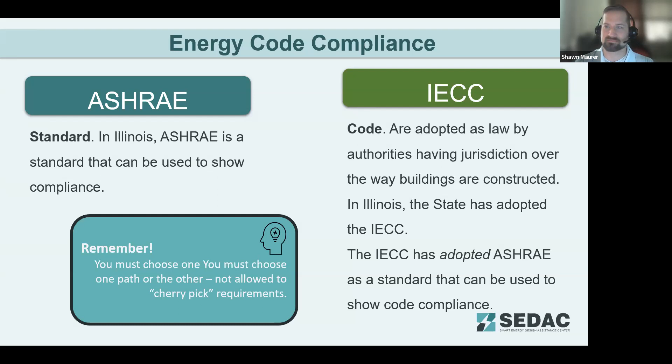This webinar or workshop is part of a series comparing the 2019 ASHRAE 90.1 to the commercial provisions of the 2018 IECC. Today we are covering lighting and electrical. Later in May, we'll be covering performance-based compliance again, and we have previous recordings for mechanical and envelope systems on our webpage.

We'll also be covering later this month building energy education for architects. We'll be looking at renewables and the zero code, getting buildings to net zero through code applications. We'll also be touching on passive house later in May as part of that education series. And then at the end of May, we'll be touching on the 2021 IECC updates, as we want to be as current as possible with updates and amendments that are working through CDB.

So we're going to do that as close as possible to the application deadline for those 2021 IECC updates. And then we'll also be doing a presentation on testing and verification, how to ensure your buildings are complying with the energy codes, in June.

As noted before, there are two compliance paths for compliance with the Illinois Energy Conservation Code: one being direct application of the compliance paths of the 2018 IECC, the other being the compliance options in the ASHRAE 90.1 standard. Some clients have elected to use a newer version of the ASHRAE standard to increase their energy savings, as it has some improvements. But for specific compliance with the 2018 IECC, the reference standard is ASHRAE 2016. 2019 will be the reference standard for the 2021 IECC when looking at ASHRAE compliance pathways.

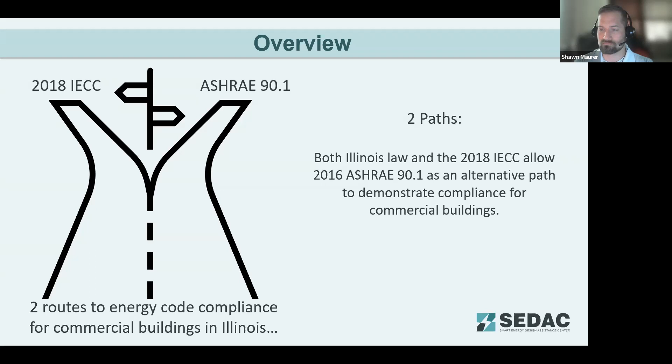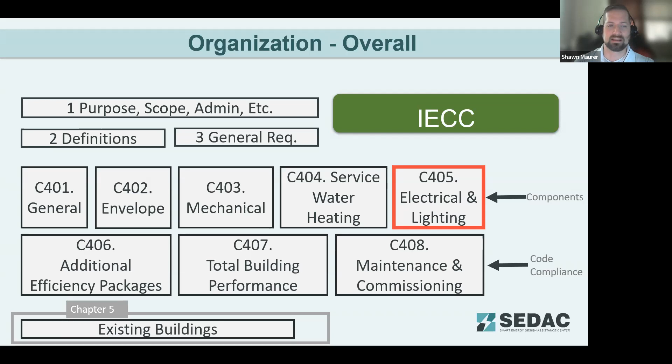Just an overview of the overall organization between the IECC and ASHRAE. We're going to be looking at Chapter 4, Section C405 of the IECC. That's the lighting and electrical compliance, and touching a bit on existing buildings in Chapter 5. The key thing here to note is that IECC does break out existing building requirements in a separate section, and lighting and electrical is grouped in with the main prescriptive requirements in Chapter 4.

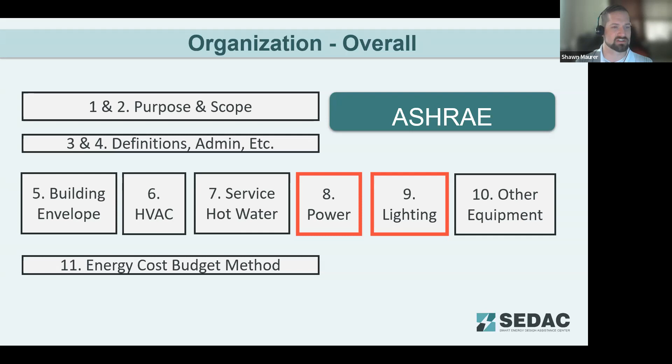As we look at the ASHRAE organization, it has an additional section on power requirements - a lot of these are going to be added in the 2021 IECC - and a section for lighting. Within those sections, they have the mandatory requirements grouped first, then the prescriptive requirements, and the existing buildings requirements are all built into those sections, so they're not in a separate chapter like in the IECC. In some cases, this can make referring to the requirements for existing buildings a little bit easier in ASHRAE, and also can make referring to mandatory requirements a little bit easier, as they have a dedicated section with each component of the building.

But today we are focusing on lighting and power requirements. The layout within these sections is very similar for the IECC and ASHRAE as far as the compliance pathways. Looking at the ASHRAE organization overall, power and lighting both have the same general organizational layout, with general requirements listed first, definitions of the compliance pathways in the next section, the mandatory provisions, and then moving into the prescriptive pathways and alternate compliance pathways, and then the performance pathways such as the energy cost budget and Appendix G.

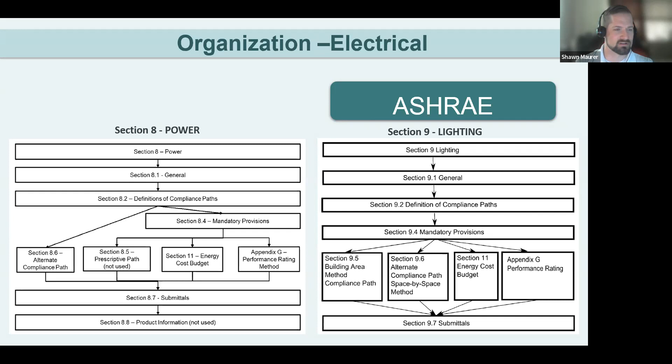Those are all followed up by required submittals and documentation. Similarly to ASHRAE, IECC's organization has the mandatory requirements interspersed throughout the section, although for the lighting section, most of those are mandatory provisions.

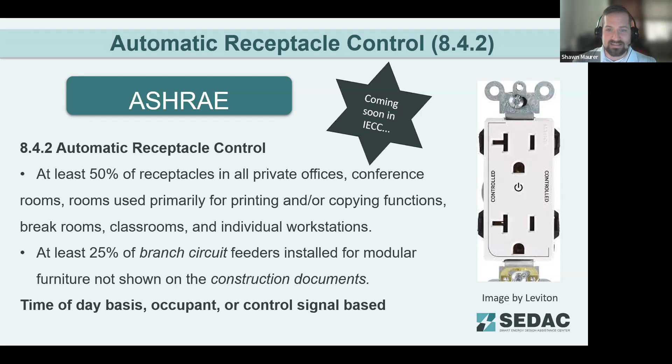And so, as noted, this is coming in the 2021 IECC. Something else that ASHRAE contains that is coming in the 2021 IECC is sub-metering or monitoring of electrical systems and HVAC systems. So these measurement devices are going to be installed in new buildings. They'll have to monitor total electric energy, HVAC systems, interior lighting, exterior lighting, and then receptacle circuits.

It can be very useful for troubleshooting and identifying issues in a building, as if you have sub-metering of individual systems and an individual system has an issue, you can see that in a blip in its energy performance trends. So the intent of these kinds of monitoring controls is to assist in long-term commissioning of the building and maintaining its performance over time.

Data for these monitoring systems needs to be held for at least 36 months. So again, you can do that kind of comparative analysis and have the ability to do some in-house commissioning of systems.

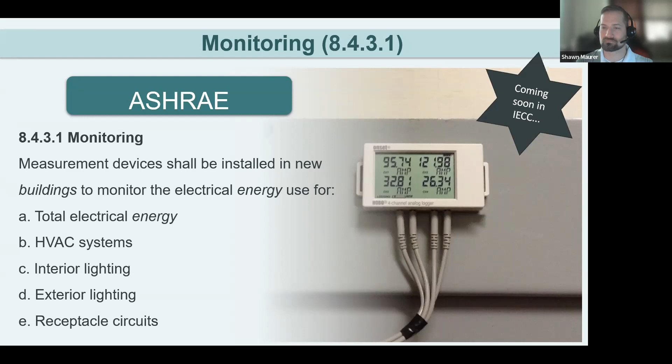Recording and reporting data for tenant spaces is where this is particularly being applied. Electrical energy for all loads specified in section 8.4.3.1 shall be recorded a minimum of every 15 minutes and reported at least hourly, daily, monthly, and annually. Data for each tenant space shall be made available to that tenant. Particularly important for like strip malls and places like that, large office buildings with multiple tenants in it, so that individual tenants can know how they're performing in their facility.

Buildings with a digital control system installed to comply with the BAS requirements of the HVAC section of the standard, that energy use required in this section shall be transmitted to that control system, so you have a central repository for data monitoring and tracking.

There are some exceptions to this requirement, generally smaller buildings, so looking at buildings less than 25,000 square feet, individual tenant spaces that are less than 10,000 square feet, dwelling units with residential buildings less than 10,000 square feet of common area associated in them, and critical equipment and branches of the NEC Article 517 are exempted from these requirements for data monitoring and reporting.

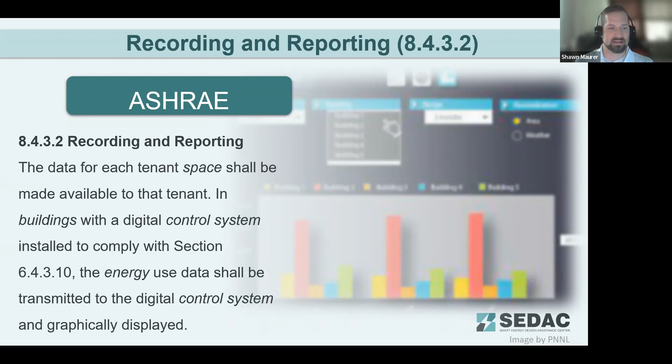Again, the main thing here is it's looking at long-term tracking of building performance and maintaining that performance over time, helping building operators and engineers figure out, is there an issue, quickly diagnosing where that issue might be through these trending requirements.

Something else in ASHRAE that is not in the IECC is a service water pressure booster system requirements.

One or more pressure sensors shall be used to vary pump speed and/or start-stop those pumps. The sensors shall be located either near critical fixtures to determine the pressure required, or some logic shall be applied that adjusts the set point to simulate operation of remote sensors. No devices shall be installed for the purpose of reducing the pressure of all water supplied by a booster system pump or booster system, except for safety devices.

So if you're boosting the pressure up, you don't want to be boosting it up really high and then throttling it down somewhere else with a pressure reducing valve. This is working towards properly sizing these pressure boosting systems and not oversizing them. And then no pressure booster system pump shall operate when there's no service water flow - you don't want to burn the pump up. So kind of a best practice, common sense requirement there.

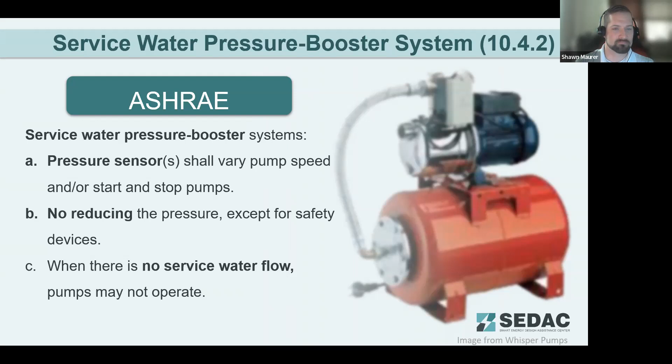And then lastly, looking at clean water pumps and those control systems, there are some requirements in ASHRAE. I won't go through all of these in detail, but for pumps meeting these certain requirements, they have to meet the requirements shown in a table in ASHRAE for motor efficiency. The standards of that section do not apply to fire pumps, self-priming pumps, prime assist pumps, magnet-driven pumps, pumps designated for use in nuclear facilities, and pumps meeting specific U.S. military specification requirements that are already anticipated to have higher efficiency associated with them. But again, this is just looking at pumps that typically have higher operating hours and conditions, that they meet specific efficiency requirements.

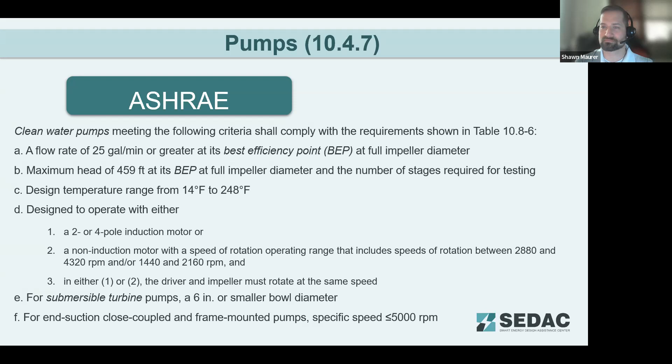Then lastly, an interesting addition in the IECC that's not in ASHRAE, kind of a rare situation here. Usually ASHRAE has requirements not in the IECC, but in this case it's the other way around. The IECC does have requirements for escalators to have regenerative drives. So escalators that are bringing people down in a facility, once they hit this weight capacity requirement, they're anticipated to have enough energy in that gravitational potential of the riding occupants that a regenerative drive will supply some energy back to the building at a cost-effective means. So just an interesting addition in the IECC - not sure if this will be coming to ASHRAE in the future or not yet, but it is important to be aware that this exception is in the IECC and not in ASHRAE.

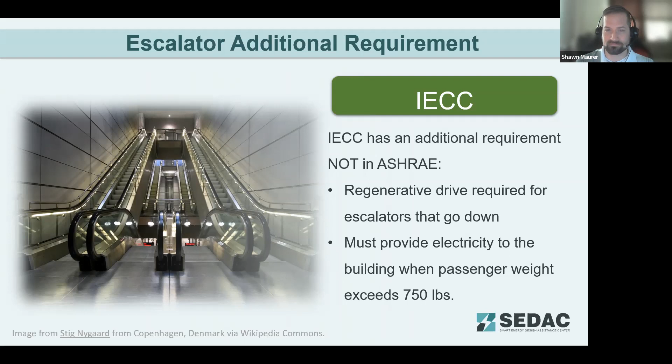So before we move on to the lighting requirements, we have another poll here. So what categories need to be monitored under the 2019 ASHRAE 90.1? Thinking back to the monitoring and reporting of electrical systems: total electric energy, HVAC systems, interior lighting, exterior lighting, receptacle circuits, or all of the above. And then, where is automatic receptacle control required in 90.1? Anywhere occupant sensing controls are required - offices, conference rooms, classrooms, etc., outdoors, habitable rooms and corridors, or everywhere.

I don't see any new questions have come in yet. Give it another second or two. Got a couple of responses coming in still. Okay.

So the first question, what categories need to be monitored? It is all of the above - so all of those do need to be monitored and tracked, again looking for tracking of building efficiency and performance over time. And then for our second question, where is automatic receptacle control required? It is offices, conference rooms, classrooms, etc. Looks like most people got that one correct.

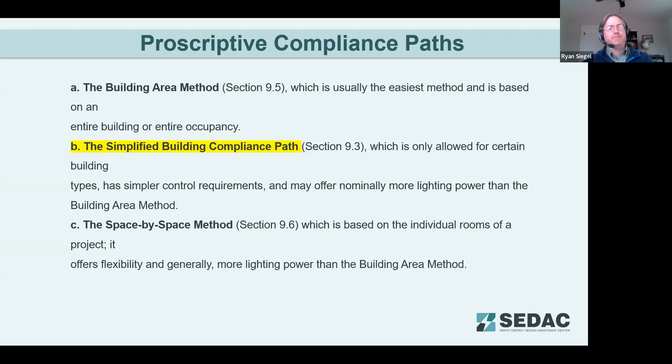So if you are using the building area method or the space by space method, there is a table that specifies the on and off controls that are required for this.

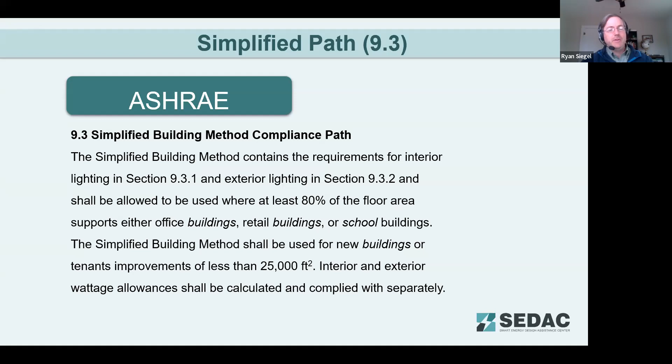Noting one of the thresholds is at least 80% of the floor area needs to be the primary building type of office buildings, retail, or schools to be eligible for this simplified building method. It can also be used for tenant improvements where you have a smaller tenant going through an upgrade, so tenants of under 25,000 square feet can be handled on their own through this.

Here's a little bit of a look at this using the office building type. We have a lighting power allowance of 0.7 watts per square foot throughout the area, and then the controls specify here's what controls you're needing for the space type.

Specifying for spaces in the office buildings other than parking garages, stairwells, and corridors, you're going to have automatic off controls. Throughout this, the lighting load, there is an allowance to leave some lighting on. This provides for egress and other needs you may have in a building to make sure that people can leave safely, even if the lighting controls have turned off.

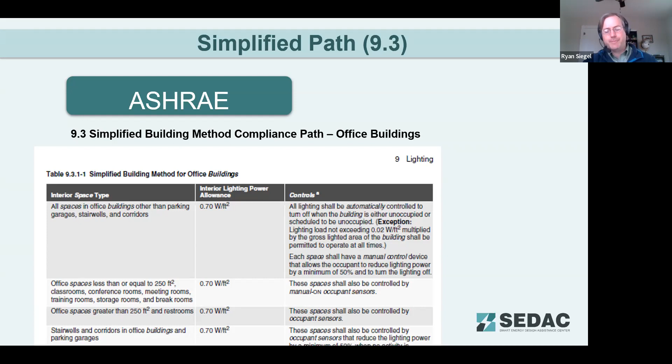So the simplified path also has its own table for exterior lighting power allowances. What we like to make sure people are aware of is, for most people and most projects, these are going to be in zones 2 and 3.

Zones 0 and 1 are for rural and uninhabited locations - think national parks and other natural areas. That's your zone 0 and 1. Zone 4 is for heavy commercial in major metropolitan areas, so zone 4 will only be found in certain locations within the city of Chicago here in the state of Illinois. Everywhere else in the state of Illinois is going to be in zones 2 and 3.

How you're differentiating between zone 2 and 3: zone 2 is more residential, zone 3 is commercial. So if you're not totally sure whether you're dealing with a zone 2 or zone 3 project, feel free to reach out to your building official and they can help provide you guidance. If you think you might be right on the border, they can help make that determination with you.

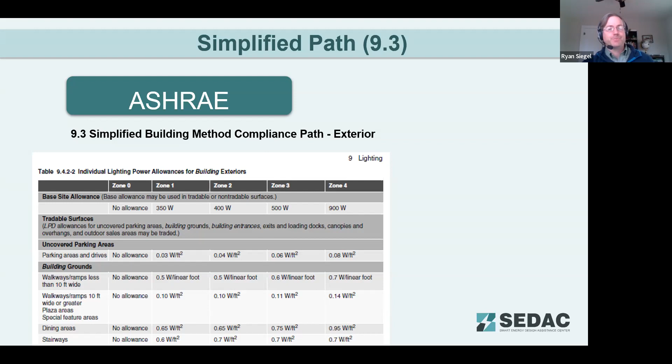For those not using the simplified method, here's where you get into the space by space method for what the controls have to be. In ASHRAE, they have several that are required, and then you'll see add ones and add twos. This doesn't mean you have to add one of B or C and then add two of H or I - what this means is add one of each of these two categories.

So I need to add either category B or C, and I need to add one of category H or I - add one of category 1 and add one of category 2. It can be a little confusing as we're going through here, but with add 1, understanding that add 1 is based on how this is controlled for turning on: either this is going to be manual on, or if it's automatic on, it's only partial.

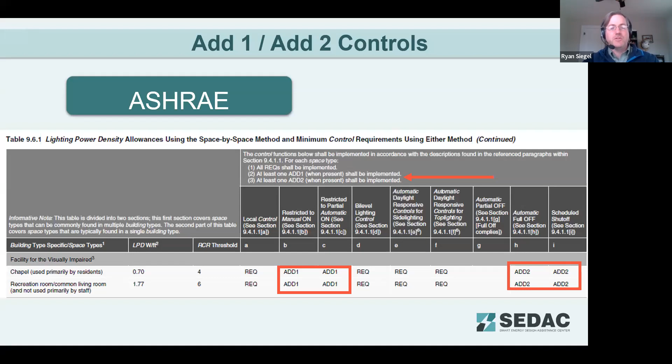So it's going to be a 50. You cannot automatically bring it on to more than 50% for specific spaces.

Something ASHRAE does a little bit differently is if you add some additional controls, you can get some additional lighting power allowances. For those more familiar with IECC, they may typically have a little bit higher lighting power allowances, but allow you to trade a reduced lighting power allowance for less control. These operate in similar fashion practically speaking, but they're worded differently from each other. So again, for ASHRAE, if you add more controls, then you can get a little bit more power budget.

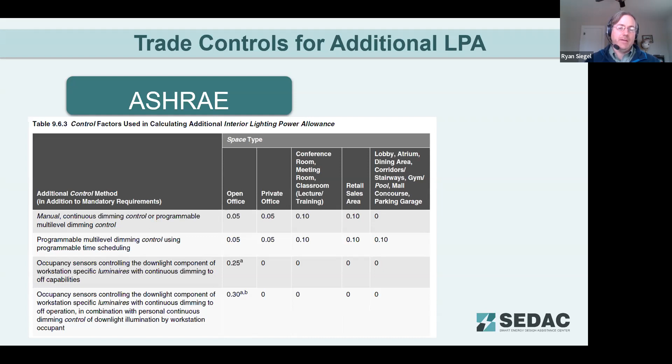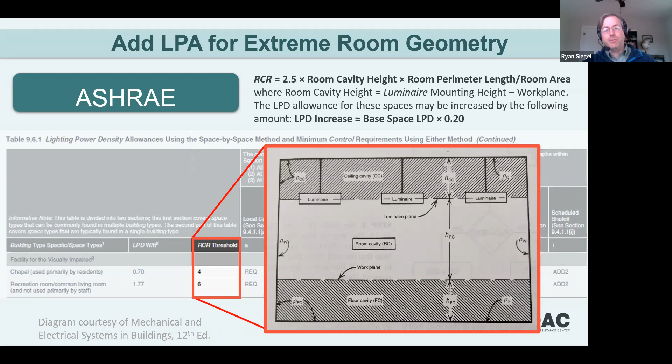ASHRAE also has some provisions for unusual room geometries, a room cavity ratio. So if you have unusually long rooms or unusually tall rooms, through this RCR calculation, you can increase your lighting power density if you have one of these more extreme room geometries. Part of this is accounting for light bouncing off of walls - if you have unusually tall spaces, you're not able to bounce that light off the walls. Similarly, if you have unusually long rooms, the walls will end up absorbing a lot of that light that would otherwise reach the floor. That's part of the reason why they've added these in.

And you may have seen there, it gives you about an extra 20% if you do need that.

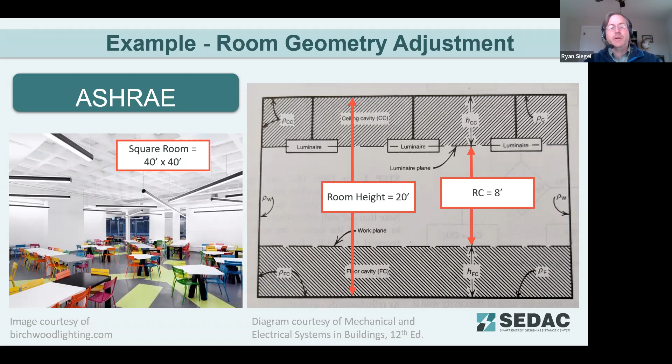So here, what we're looking at is we've got a 40 foot by 40 foot room, total room height of 20, and the cavity between the luminaire and my work plane here is specified as only 8 feet. Because I have a very tall room relative to my fixtures - or because my fixtures are not using up that large room height - I end up not gaining or not needing that extra bonus budget. If I did move the fixtures much more towards the ceiling, then I might cross that threshold.

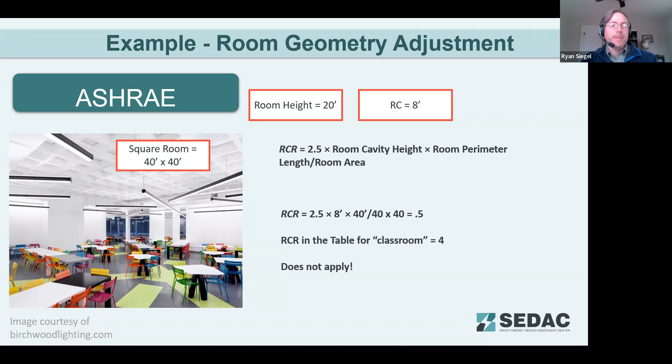Here the room cavity ratio calculation shows a result of 0.5. In order to cross that threshold for a classroom space, I need to be above 4. So as you can see, these are rather extreme cases.

Here is a similar, different type of classroom setting, but here we've got a very tall room at 35, and the fixtures are all towards the ceiling. So my room cavity at 32 feet, going through the calculation, gives me a room cavity ratio of just under 13. So here we do get above that 4 threshold, so I do have that extra budget in there.

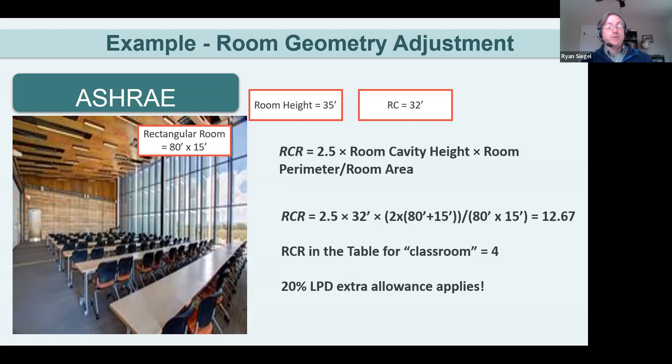Manual controls - ASHRAE does have manual control requirements, which, as we think through this, having manual controls even if I do have automatic controls is good practice, from the standpoint of wanting occupants to have the capability to turn the lights off when they're not needed. You may have occupants in the room who don't need the lights, either because of windows or because of the type of work they're doing. If they're doing a presentation and trying to read a screen on the wall, having the ability to turn those lights off and have that manual control is very beneficial for them.

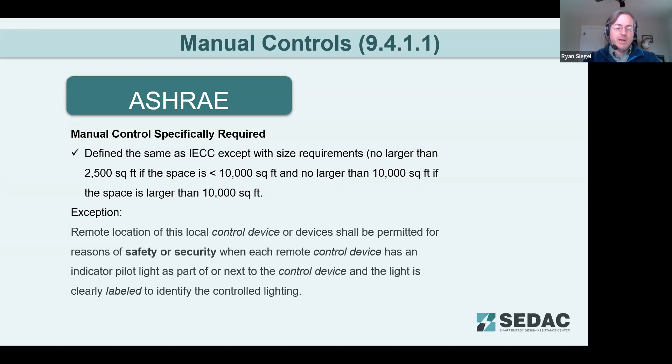So with that, let's do a little bit of examples as far as some of our controls. Here looking at a meeting space, 20 foot by 40 foot, so we've got 800 square feet of room space.

Total lighting load in this space is 200 watts, or 1/4 watt per square foot. Ceiling is 7.5 feet tall, and I've got windows that are 7 feet off the floor, with 7.5 square feet of window or fenestration per window, and we have 4 windows in this space. So this is the sample room that we're going to look at for reviewing these controls.

First, is continuous operation necessary for safety or egress? Being that this is a meeting space, we don't have to have 24/7 lighting for safety and or egress. If we did, then controls would not be required. Typically for continuous operation and for safety, this would be hospitals, laboratories, or other areas where if the lights were to go off, that would really cause a safety hazard. Since we are not required for continuous operation, we'll go on to question number 2.

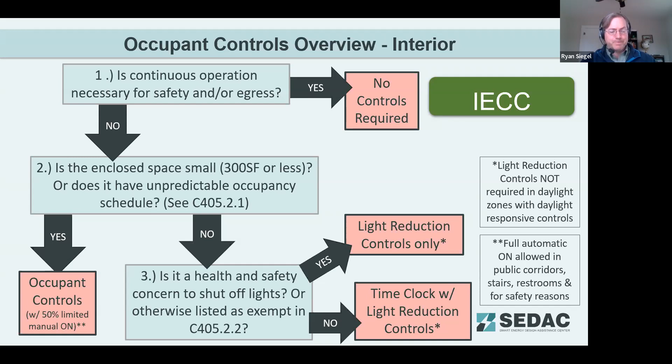Now looking at daylight controls, continuing in the IECC. First question: is the space adjacent to fenestration of at least 24 square feet, or a skylight? We mentioned earlier those windows were only 7.5 square feet per window, so I don't meet that 24 square foot threshold. Because I don't, daylight controls would not be required for that space.

If we assume for a second that it was, then the next question is, does it receive sufficient light? That's dealing with whether I have blocked sunlight through adjacent buildings and other things, or is there more than 150 watts of electric light in that zone? If we do get sufficient light and there's more than 150 watts, then we get into a question of, did I use reduced lighting power density? If I did, then I can avoid the use of daylight controls. Otherwise, if I used more of my power budget, then I would have to add daylight harvesting controls.

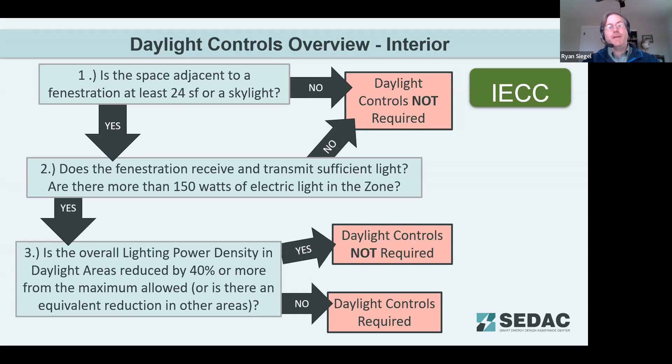As we move to the outside of a building, there's a few questions to check as far as exterior lighting controls. First, is the lighting controlled from a dwelling unit? This is a commercial building, but you may have residential dwellings in a commercial building. Or is it a vehicle entrance for a parking garage? If it is, then you don't have to do any automatic setback.

Presumably for the dwelling units, that's going to have your manual controls inside—typically for a balcony, someone's going to turn a light on when they go out and turn it back off when they come back in. If not, then we need to look at sensors. First, we do have to have a daylight sensor for exterior lighting controls.

Then the second question is, is this lighting decorative? That could be landscape lighting, facade lighting—those are probably the two most common out there. If it is decorative lighting, then we need to have a timer to turn them off during non-business hours. It does allow for an additional hour beyond your actual non-business hours, so if your store closes at 5 p.m., the decorative lighting needs to be turned off by 6 o'clock.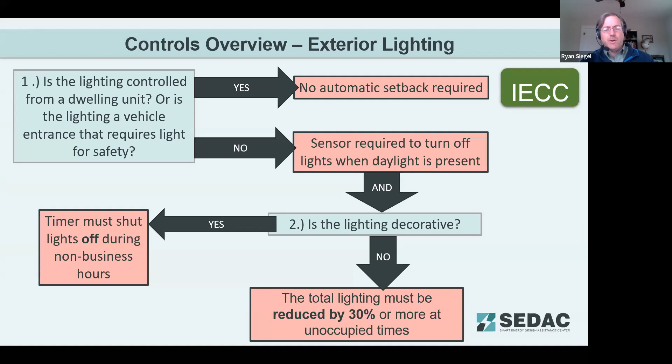So with that, let's take a look at some comparisons. We've got a poll question.

So looking at our lighting controls here. First question: in the IECC compliance example for the meeting room we talked about, that 800 square foot meeting room, which lighting controls were required? Occupant sensing controls, light reduction controls, manual controls, daylight harvesting controls, or time switch controls? And then our second question: which of these locations does not require occupant sensing controls? Classroom, laboratories, offices, spaces 300 square feet or less, or restrooms?

Give it another second or two for people to answer. Okay, go ahead and share those.

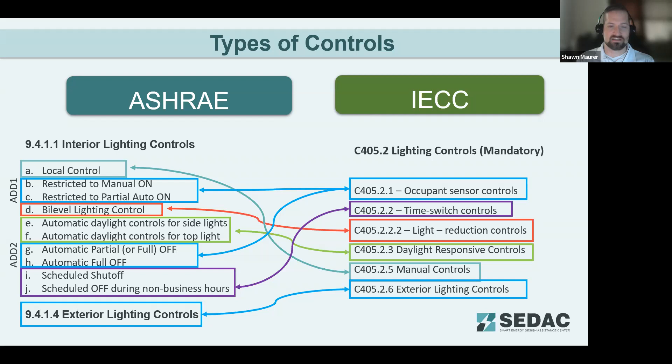Manual controls tie into the local control of ASHRAE. The requirements are very similar there. As Ryan touched on earlier, there's a slight difference in the square footage application between those, where ASHRAE's got a couple of steps that IECC does not. And then lastly, exterior lighting controls—these are very similar between the two. So just looking at them in detail.

Controls fall into three main categories in the IECC. You've got local control, which is pretty much required in every space. Then occupancy and vacancy based control with automatic off or timer controls. And then light level controls through daylight sensors and light reduction control requirements.

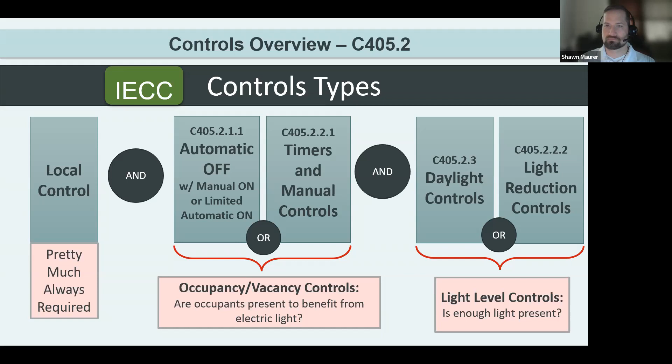Looking at ASHRAE, again, very similar breakout. Local control is pretty much always required in spaces so that occupants have that manual control capability. Then you've got the occupancy and vacancy-based control components, and lastly, your light level controls and daylight harvesting requirements.

Daylight and dimming, similar to the IECC, work together because photo control should reduce electric lighting power in response to available daylight using continuous dimming down to 20% or less, and then off. There does need to be a full off option. But in the case of ASHRAE, daylighting controls must coordinate with bi-level lighting controls. This is another additional step in ASHRAE that's not tied in IECC.

If you've got the dimmer or other bi-level control that's requiring lighting to be at a reduced lighting level, your daylight can't then adjust the lighting above that required level, and vice versa. If your daylight sensor is dimming the lighting, your bi-level controls can't then turn on lighting beyond that required lighting level that the daylight sensor is asking for. So there's a little bit of control complexity introduced here trying to maintain that lighting efficiency, but it does add a little bit of complexity in your control requirements.

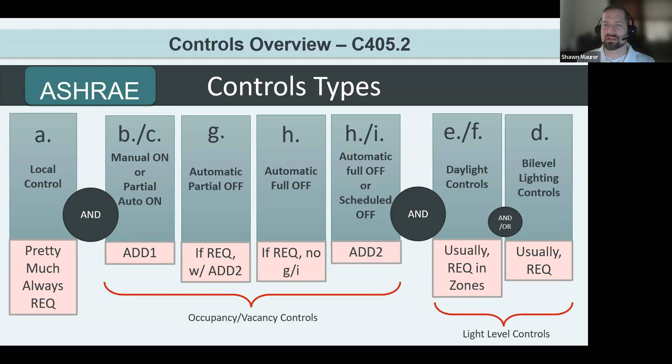So again, thinking back to our IECC example for the meeting room, we're going to look at it here on the ASHRAE side. For conference or meeting space, the space is going to have automatic partial off control per the table shown here. And then daylight responsive control must continue to control the lights, but it must stop adjusting lighting power above that automatic partial off set point. So this is kind of that interaction we were talking about.

The IECC states that bi-level control needs to decrease lighting to at least 50%. So off is at least 50%—that's a valid state. Again, ASHRAE requires at least that one intermediate step between 70 and 30%, or continuous dimming capability.

Coming up new in the 2021 IECC, compliant light reduction options are going to be a little bit clearer and more in line with the LED era. So lighting power densities are going to get a little bit lower. Control options are going to get changed a little bit to account for the efficiency of LEDs. These options are going to include continuous dimming of all luminaries from full down to that 20% lighting power and then full off, and switching of all luminaries to that 30 to 70% of full power. So it'll be more in line in the 2021 IECC with these ASHRAE requirements.

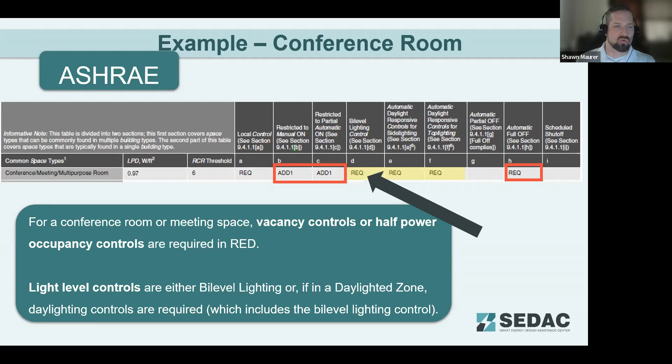What we're calling out here again is that for a conference or meeting room, that bi-level lighting control requirement is required for that space.

So looking at our example conference room, going through the IECC process flow here again. IECC is going to require occupancy sensors for a conference or meeting room—it's on that list of required spaces. And then since that space is larger than 300 square feet, but it does have that unpredictable occupancy, as Ryan mentioned, it's going to require occupant controls with that 50% limited automatic on requirement.

The big difference between ASHRAE and IECC here for this particular space is that in the IECC, there's not a requirement for that lighting level control if automatic on is used. So where ASHRAE requires that mid-level step between full on and full off, IECC can allow full off control there.

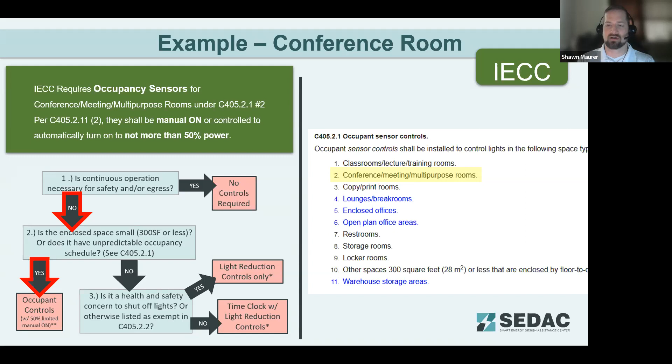Here, looking at the daylighting control requirements for the IECC, again, as Ryan covered, in the IECC, the daylighting controls is looking at the individual area of fenestration in that space. So as long as an individual window isn't greater than 24 square feet or under a skylight, then daylight controls were not required for that conference space.

In ASHRAE, however, it looks at the total fenestration area serving that space, not the individual window units. So in the ASHRAE example, it would actually require daylighting controls in that space, just based on the fenestration area. But then looking at the controlled lighting within the control areas, because it's less than 150 watts of lighting in each daylit area of those windows, it would be less than 50 watts most likely. You probably only have one fixture served by the daylight area of each of those small windows. Then daylight controls would not be required. So it's the same net result in the end, but a slightly different pathway to get there.

And again, we like to note that the IECC does have an additional exception that's not in ASHRAE: if you can reduce your lighting power density by at least that 40%, then you're not required to have the daylighting controls. So again, accounting for as we get more efficient with LED lighting, there's diminishing returns on having additional controls of more efficient lighting. You can save that capital cost for the building by going above and beyond on reducing the installed lighting power, to then avoid having to put in additional controls.

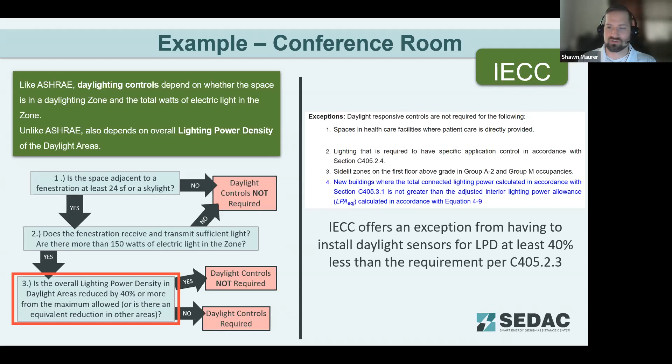Again here, touching on that bi-level lighting control for lamps with daylight control. Since occupant sensors are required in this space, it does have that step-off requirement for light reduction controls. In the IECC, that step can be at least 50% or full off, because that falls in the at least 50% requirement. For ASHRAE, you have to have that intermediate step between 70 and 30%, or continuous dimming for those light reduction controls.

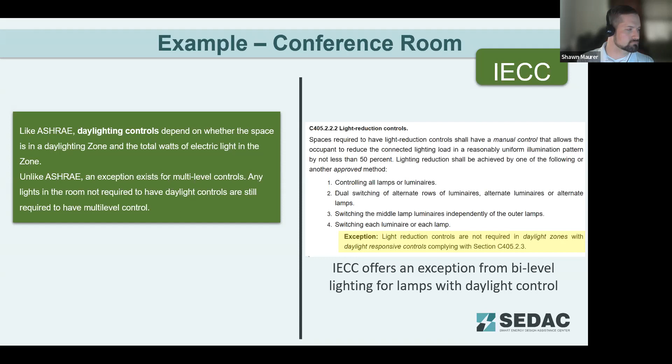Looking at occupancy sensing requirements, this is the list of spaces in the IECC where occupant sensing devices are required. For most buildings, this is going to be almost every space in the building. New to the 2021 IECC, corridors are going to be specifically listed as one of the applications requiring occupant sensors,

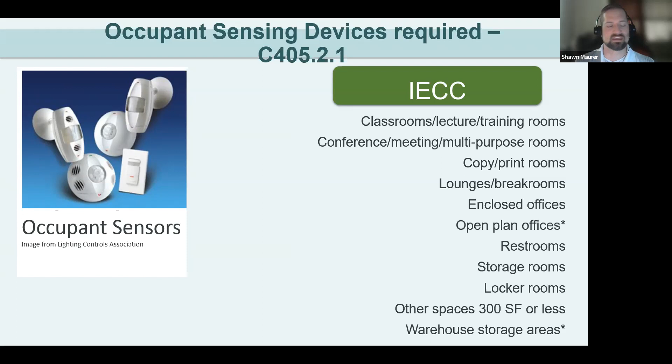and they'll have their own section with specific requirements for lighting level controls tied to those occupancy sensor requirements. Unless the corridor is lighted with a bare amount of illumination required for safety, that bare minimum safe passage lighting requirement, then lighting power must be uniformly reduced by not less than 50% within 20 minutes of that hallway being unoccupied. We do see this applied in some buildings already, but this is now making it a prescriptive requirement.

Something that's slightly different in ASHRAE than IECC when looking at daylight zone definitions: ASHRAE has incorporated a definition for multi-story spaces on what areas are going to qualify as daylit areas. On the top floor, underneath a skylight assembly in that atrium space, it's going to be the normal definition. But as you go down through the atrium, as floors block off that light level down to the subsequent spaces, you narrow down that daylit area that falls into the requirements for daylighting controls. This adds a little bit more clarity on how to apply daylighting controls to a multi-level, multi-story space that's not currently in the IECC.

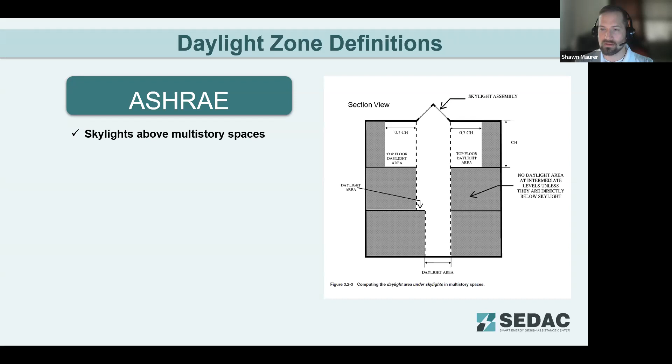Some slight differences in daylight zone definitions. Here, ASHRAE accounts for projection factor for side lighting calculations that the IECC does not account for. IECC has a specific area that counts as side lit area based on the height of the window from the floor to the top of the fenestration assembly laid down into the floor plan. That gives you your daylit area out from the wall, and then 2 feet on either side of the window. For ASHRAE, it's slightly different, and they do have this projection factor adjustment incorporated in there.

ASHRAE also has a secondary side lit space defined as well. When looking at the primary side lit area, that's the area laid down just as in the IECC definition - you take the window height to the top of the window above the finished floor, lay that down onto the floor plan, that's your primary side lit area. The secondary area is just taking that area and duplicating it again more towards the core of the building - essentially double the window height into the space.

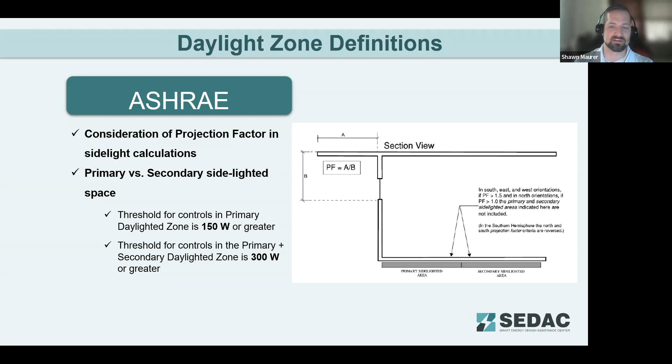So we saw this chart with the simplified building method again. Now we're just bringing it up again to go over the building area and space by space methods. Generally, these requirements are the same as the IECC as far as the spaces included. The building area method spaces are the same, and the space by space method spaces are the same, because they come from the same general resource.

Interior lighting power density requirements for the building area method generally give you a lower lighting power allowance. The space by space method generally gives you a little bit more lighting power allowance, and with the ability to trade off between spaces, you get a little more flexibility in your lighting layouts with space by space than you do with the building area method.

When looking at the lighting power density allowance exceptions, they're going to be a little different than in the IECC. Lighting equipment and application exceptions are permitted under exception 9.2.3.1 listed there.

ASHRAE allows extra lighting power allowance, as Ryan covered earlier, for additional controls beyond the minimum requirements. In the IECC it's inverted - if you install additional controls, you can increase your lighting power allowances. So ASHRAE allows the extra first and then the additional controls to compensate, while IECC allows that higher lighting power density if you install the controls. Essentially they come out to about the same, but they're worded differently.

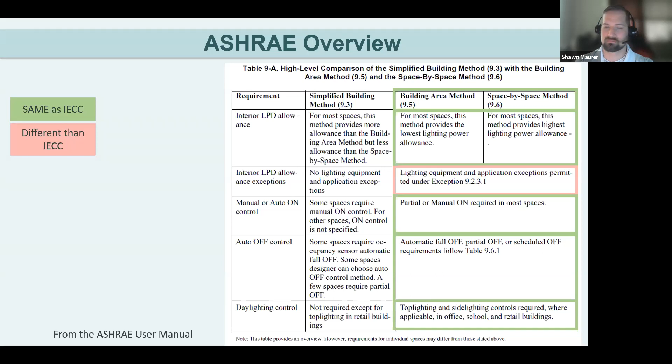Looking at manual on, auto on - again, partial or manual on is required in most spaces, given that manual requirement to occupants. For auto off, drilling in here, when you're doing that stepped off control, you can have automatic full off, partial off, or scheduled off requirements. Very similar to the IECC, and daylighting controls will be fairly similar between the two as well.

I think we have another poll here.

So for bi-level lighting controls, ASHRAE is more specific, requiring a setting between 0 and 100%. Is that true or false? And then which code allows an exception for daylighting controls for a total lighting power density in daylit zones at least 40% below the code maximum? Is it ASHRAE, the IECC, or both?

We had a couple of comments come into the chat. Any key areas that are overlooked or calculated incorrectly that need special emphasis at plan review? I'm not sure, Ryan, have you run across any particular issues? Yeah, a few different things to look at.

First, when we're looking at occupant sensing controls, as Shawn alluded to earlier, most all spaces are required to have occupant sensing controls, with a few exceptions at the present time. Again, that list continues to expand and expand - at some point we'll just say, put them everywhere and we're done.

But as far as daylight harvesting controls, one challenge we see is the daylight zones not being identified, which should be identified so the plan reviewer can verify if you've crossed your wattage thresholds or your watts per square foot. Again, as Shawn mentioned, with IECC, if you drive down your lighting power density, you can avoid having to install daylight harvesting controls, whereas in ASHRAE that's not quite the same.

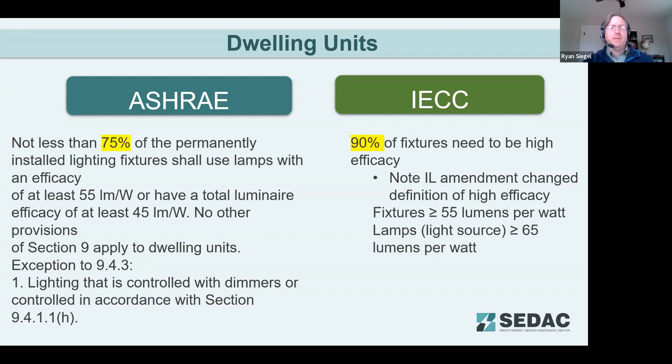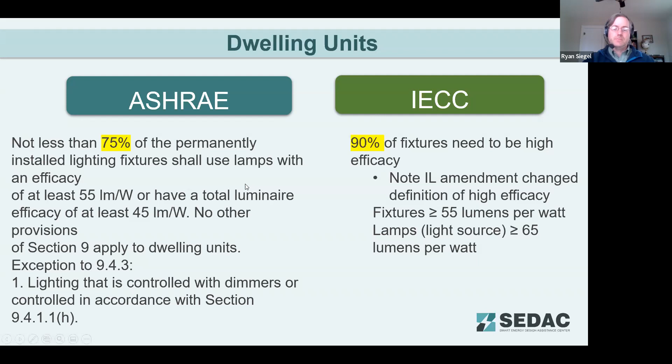Even when we did our market basket analysis a few years ago, we found that 85% of the products on the market met high efficacy lighting. And it generally was the higher end fixtures that were not meeting the requirements - they may have been a little more specialty and things like that. So that is one little difference, a little more stringent on the IECC side of things.

As far as some of the exceptions to the lighting power density, ASHRAE has this table of exceptions for this. Note that this does not qualify in the simplified method. So this is presented a little different between ASHRAE and IECC. Here in ASHRAE, they present this as exceptions, but then also notes as far as any controls that are required for these.

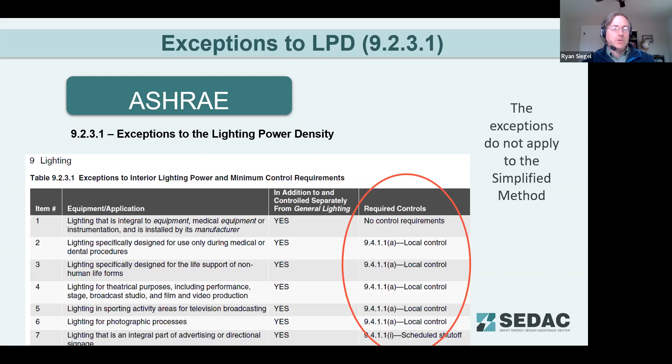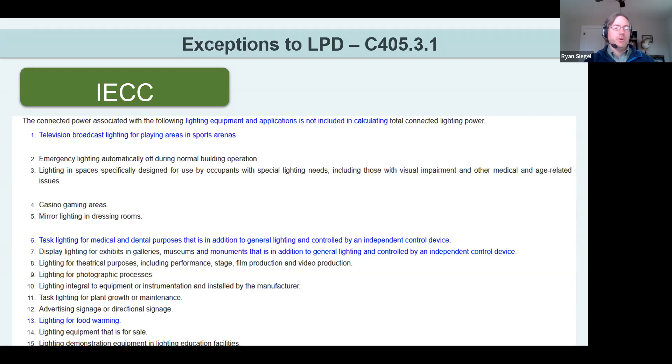Whereas if we move over to the IECC, they just list here's what's not counted in your lighting power density. So IECC does not call out separately as far as the controls for these lighting requirements. And as you kind of see from both of these lists, this is for other purposes - these are not general area lighting: TV broadcast and food warming, photography, for photographic purposes, things like that.

With that, here's a look as far as this is for the IECC lighting power density. We see in the building area method, they just have one for hospital, just over 1 watt per square foot. Whereas in the space by space method, as mentioned earlier, you have to break it down into each individual category - your exam rooms, medical supplies, patient rooms. And you'll see several of these are less than the 1 watt per square foot - medical supply and patient rooms, which hospitals have a lot of, are much less than one. Then you've got ones that are over one, the exam room and particularly the operating rooms.

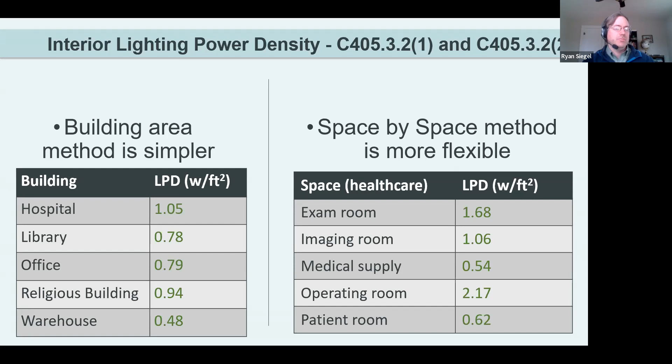So overall, you're probably going to come out fairly similar - might be a few percent difference, but not dramatic. So if you need that extra budget, then maybe you do the space by space method. But at this point in time, again, because of LEDs and what's available out there, meeting the building area method generally is not too difficult. So here we see a little bit of a difference for the building area method.

What we see here is ASHRAE is a little bit more stringent. However, again, with ASHRAE, they say if you add more controls, then you can have a little bit higher lighting power density - so you can get there. Whereas the IECC says if you get your wattage down further below this budget, then you can drop controls. So they're very similar end result, but how they get there is a little different. And that's where if you do check the tables, you will see that generally speaking, IECC gives you a little bit more leeway.

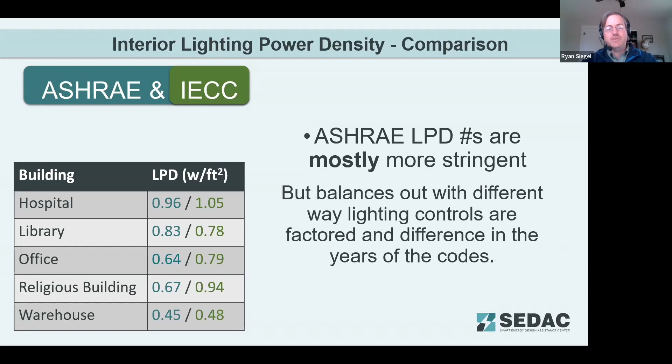IECC also has a specific requirement for lighting controls in open plan offices, with different zones and reduced lighting power. As a zone becomes unoccupied, at least 80% of the lighting in that zone has to drop off. Once all the connected zones in that open office area are unoccupied, the remaining 20% have to drop as well. Understanding this, it's probably easier when the sensor just controls everything in that zone, so when it's unoccupied, it all drops off. That way you're not networking the controls together, which can be much more difficult during commissioning and maintenance.

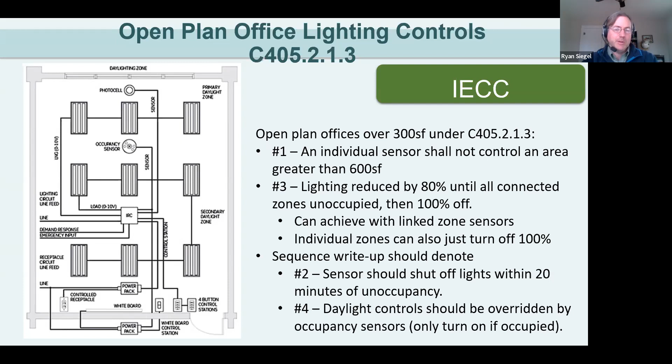ASHRAE does it a little differently. It just says lighting can automatically go on to more than 50%, but the control zones have to be 600 square feet or smaller. Understanding that in an open plan office, it's not terribly logical for someone to have to interact with the lighting controls because these are large open spaces generally, so that can make it a little hairy that way.

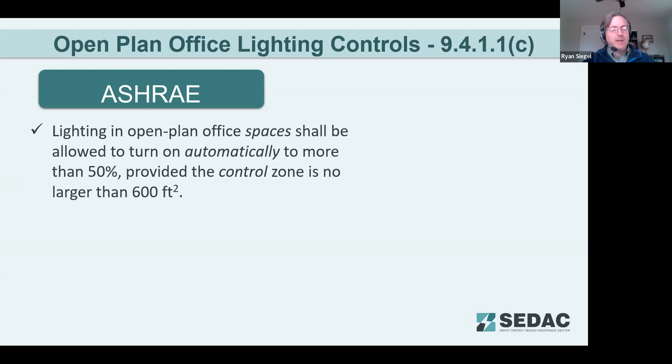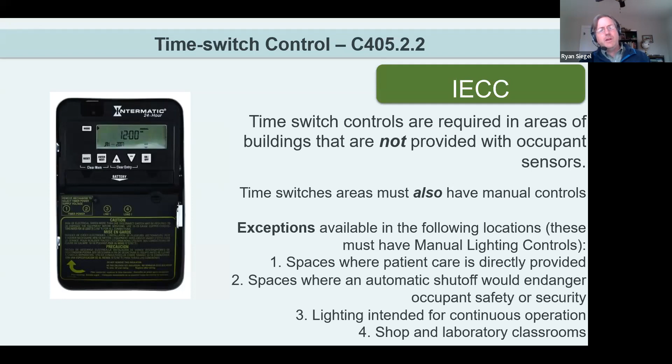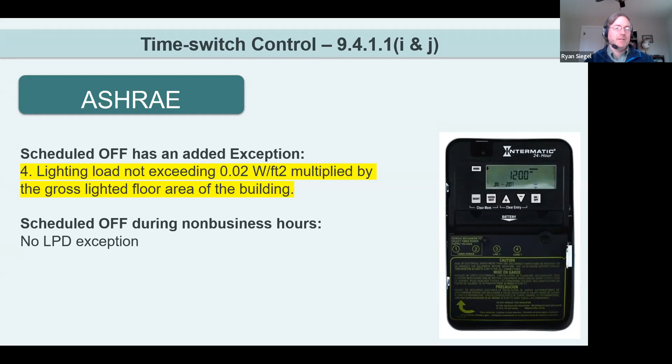For time switch controls in IECC, if you don't have an occupant sensor, you're going to need a time switch control, and if you have time switch controls, you have to have manual controls too. ASHRAE does this a bit differently. There is a nominal amount you're allowed to leave off of time switch controls, predominantly your egress lighting, at 0.02 watts per square foot - that's one 20 watt fixture for every 1,000 square feet, so very minimal lighting. IECC deals with this through exceptions, saying safety or egress lighting does not have to have time switch controls.

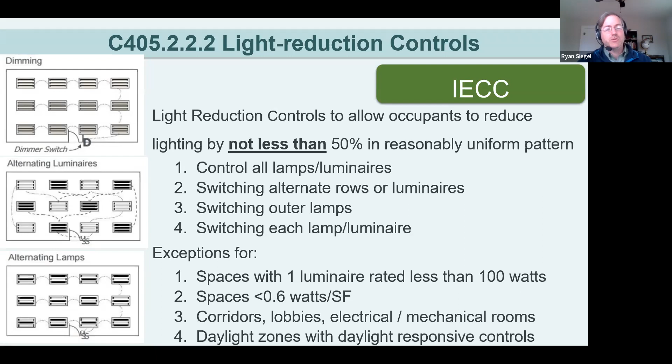Light reduction controls, which we've touched on earlier, must allow occupants to reduce lighting by not less than 50%, with a few exceptions. Probably the easiest one is for spaces under 0.6 watts per square foot. With current technology, we're seeing designs somewhere in the quarter to half a watt per square foot range, so you may be able to avoid light reduction controls - you'd still need time switch and occupant sensors, but not light reduction controls. ASHRAE requires at least one step between 30 and 70%, generally 50%, but it doesn't have to be exactly that.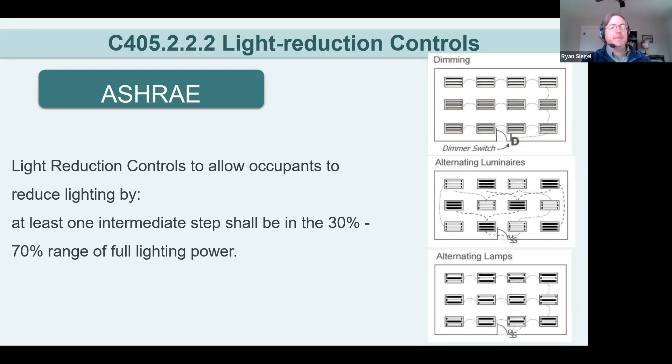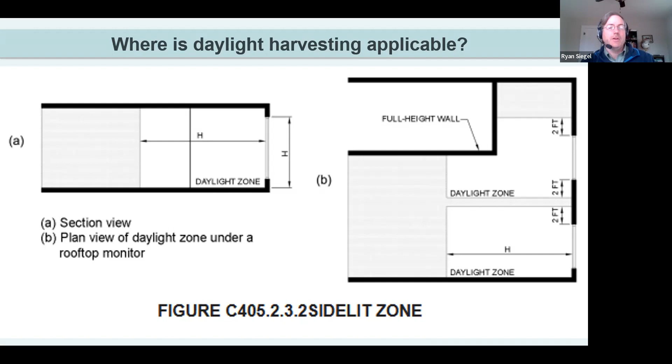Daylight harvesting is another area that's been worked on over time. IECC actually has some very nice drawings in the code document, available online, showing head height flopped in, and then 2 feet on either side of the window. These are very similar between ASHRAE and IECC - ASHRAE sets that limit at 20 square feet, IECC at 24 square feet of glazing area, so just a few little differences here and there.

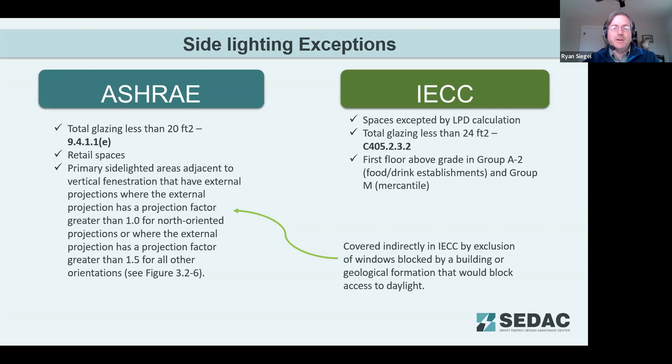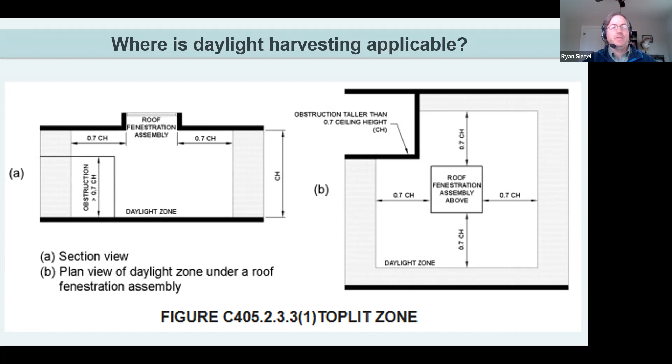Overall, we've seen the ASHRAE standard and the IECC code coming into more and more alignment over time. Looking at top lit spaces, this is 70% of the ceiling height for each side, and there's just a nominal difference between the two for the skylight aperture - 0.006 versus 0.008, so just very minimal difference.

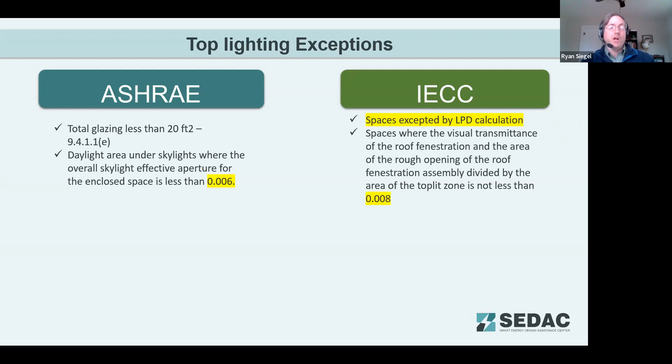IECC does have a lighting power density calculation. If you're able to drive down your watts per square foot, you can avoid the top lighting requirement. We like to highlight this to make sure people are aware - if you get your lighting down by 40% of the weighted area, you don't have to add daylight harvesting controls, because you took the watts out to begin with and got your savings without adding more controls. We like that because the simpler things are, the more likely they are to be maintained. We're seeing this 40% achievable without too much difficulty.

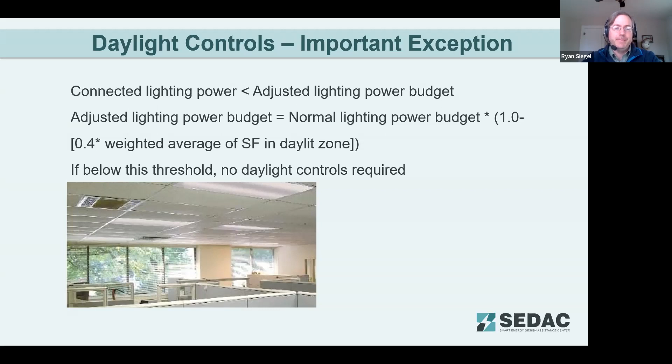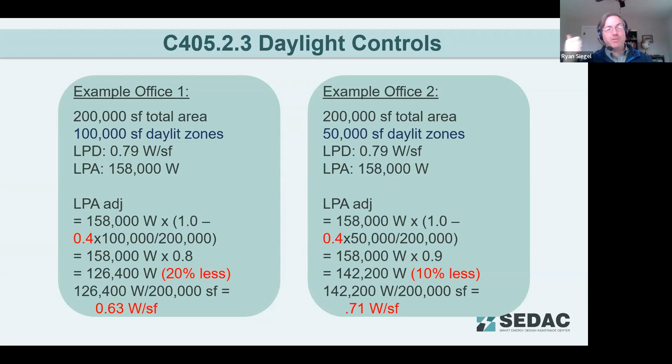Here's a brief example of what that looks like: a 40% reduction of the weighted area. So if I have half the area in a daylit zone, I need to be down by 20% overall. If I only have a quarter, then I need to be 10% lower overall - a quarter of 40% is 10%. So if I'm below that threshold, I'm done with daylight harvesting controls - don't have to buy them, install them, or maintain them.

With daylighting zones, regardless of whether you're controlling it through a time clock or an occupant sensor, you still have that 150 watt threshold. And if you're going to control banks of lights together, they have to have similar ambient light profiles. So you can't control the east-facing lights with the west-facing lights because those have very different ambient light conditions. You want to make sure whatever you're controlling makes sense together, so you don't leave some people in the dark while others are in plenty of light.

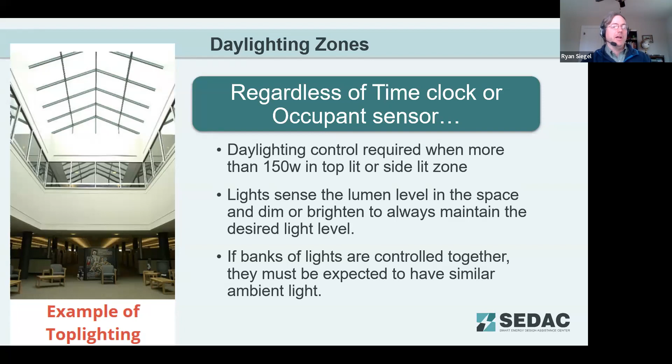As far as lighting retrofits, ASHRAE sets this limit at 20%. So if you're altering less than 20% of the fixtures in a space, you don't have to add controls. They also have a provision where if you're just doing a lamp and ballast change or a 1-for-1 luminaire replacement, you're just checking for your lighting power density requirements and whether you have automatic off or timer off controls. So ASHRAE has that 20% threshold, and a 1-for-1 swap is allowed.

IECC has a 10% threshold in order to not trigger that, and also allows bulb and ballast replacement within the existing luminaire. We don't see too many issues or too many times when lighting retrofits require a full replacement, predominantly because many times if all you're doing is a lighting swap, that's not requiring a permit from the local jurisdiction. If all you're doing is bulb and ballast within the fixture, that's considered a repair and therefore generally not required.

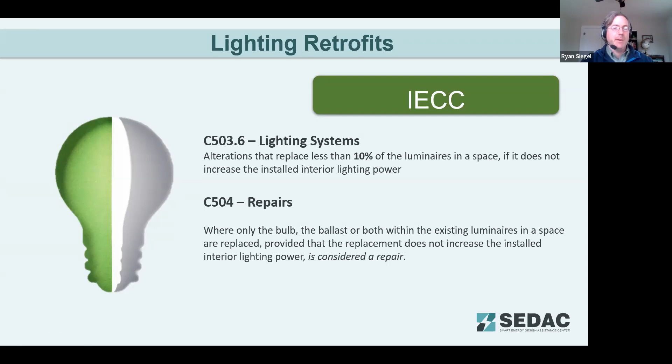So here we're looking at an office retrofit for a 5,000 square foot space. They're moving in and upgrading luminaires in some private offices and a conference room. How does this apply? What it looks at is saying whatever you're touching needs to comply. So just because you're doing a lighting retrofit doesn't mean you have to insulate the walls, but you do need to bring the lighting up to standard in the spaces you're doing it. If all you're doing is offices and the conference room, that's all you have to worry about—you don't have to worry about the open office area you're not touching.

Similarly, when dealing with outside and parking retrofits, if you're leaving the existing housing and all you're doing is a lamp and ballast change, you're not having to deal with anything else. Be aware, particularly for lighting retrofits, if they're on a timer but don't have photo controls, we would highly recommend, even if it's not required, to go ahead and add your photo cell and photo controls, because heat is really what kills LEDs and electronics most of the time. If you can avoid having your LEDs on in the heat of the day, that's definitely good—so be aware of that.

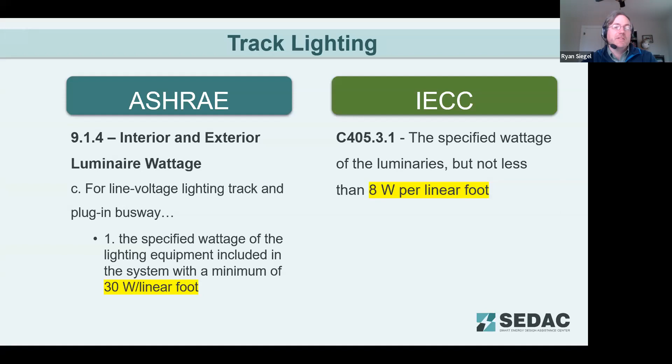With that, I believe we have one final poll question: looking at whether a lower power allowance in ASHRAE is necessarily stricter than a higher allowance in IECC. Is it always stricter, or does it depend on your controls selected and room geometry? And second, we'd like to learn more—have we helped your understanding of ASHRAE 90.1 or IECC? Yes very much, somewhat, or not so much.